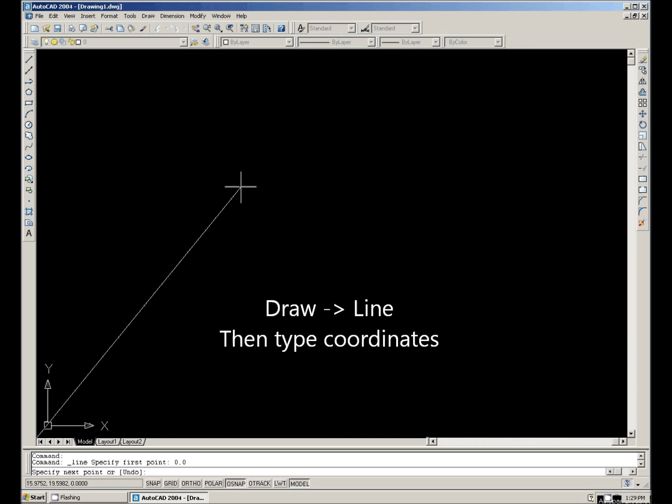I'm going to draw a simple square with a circle in the center of it. So I'm going to draw a line. I'm going to type the coordinates in. So I want 0,0, 4,0, 4,4, 0,4, 0,0. Okay, so we have our basic square. Now I want to draw a circle inside of that. So I want to draw a circle in the center, which would be 2,2, and I want to draw a 2-inch circle. Okay. We now have our drawing.

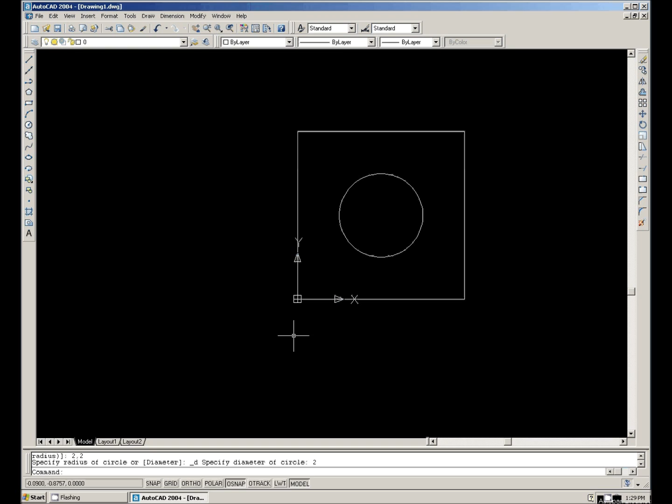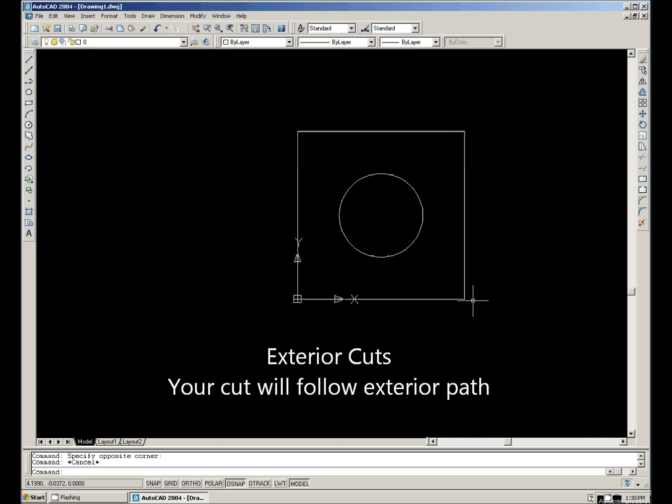We want to cut this out. We obviously want the torch to cut the circle first, and then the outside profile. And we want to cut them differently. So we want to cut the circle with the torch following inside the path because there's a kerf with the torch. It actually eats up metal. So we want a 2-inch circle. We want the torch to follow inside so that our circle is actually 2-inch. And the same goes for the outside profile, except we want to be on the outside of it so that our square is actually truly 4 inches.

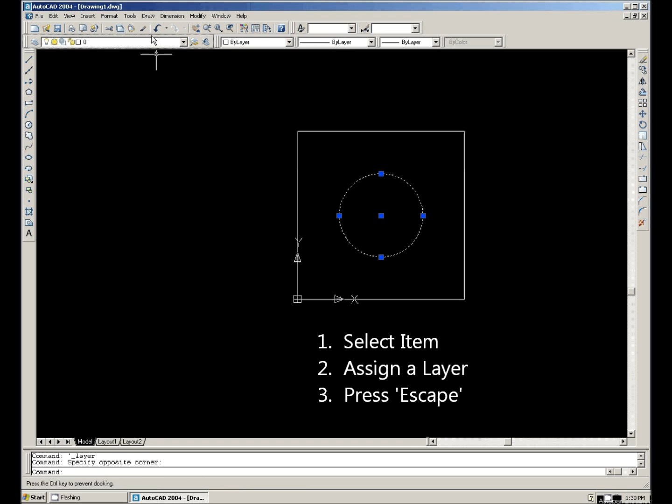The way the computer differentiates between these is by what's called layers. So the first thing we're going to do is go up here and we're going to create 2 new layers. We're going to create one called inside, and I'm going to give it a color. The color is irrelevant. It's for your visual only. The computer doesn't use colors whatsoever. And outside. Alright, now I'm going to select my item and tell it what layer I want it to be on. Hit escape, select my outside profile, call it outside.

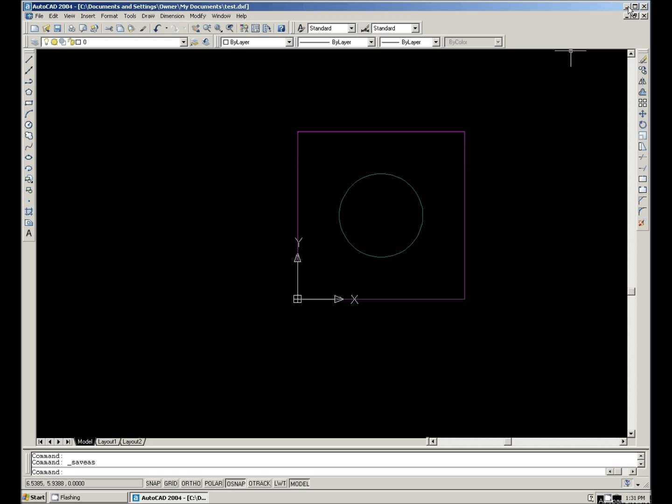So now we have 2 distinct paths that our torch can take, and we are ready to proceed to the next step as soon as we save it. So File, Save As. You always want to save it as a DXF, not a DWG. Any one of the DXFs will work. It doesn't matter which one. I'll call it Test. Overwrite it, replace it, yes. Okay. So that is it for step 1. We don't need to close the program, we can just minimize it and leave the drawing in there in case we need to change it. Now the next step will be cutting the part out.